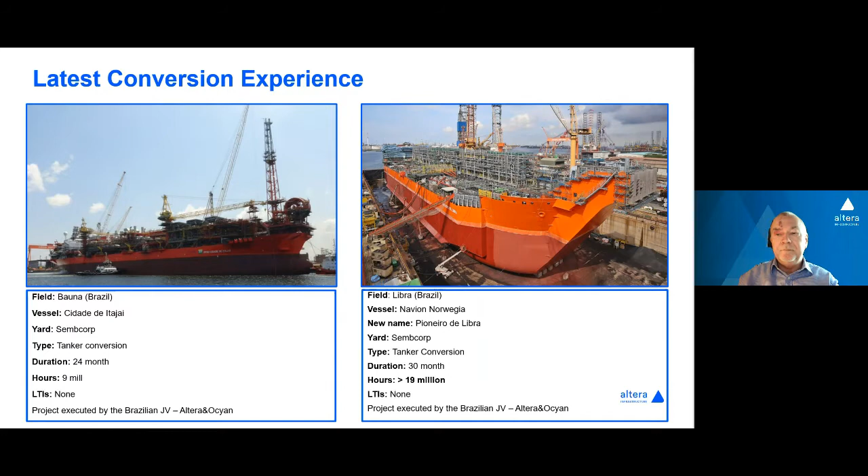What we see here is the project we did, Navion Norvegia to Pioneiro de Libra. As I said, a very successful project. Today, Libra is operating for Petrobras offshore Brazil. We have a long-term contract until 2029, and there are also opportunities for further extension on that project.

But it is interesting to see how it looked before it was converted and what a sophisticated vessel it is today. And when you look at it, you may say, oh, this is not really a big one. It's only 50,000 barrels per day. But what is special with the vessel is that it is done as an early production vessel, which actually can move from one place to another. And therefore, it actually has to be designed for different compositions. So we would say this is a very successful project. So let us go to the last slide in my part of the presentation.

And here we actually see the shuttle tankers we have available through the unit in Altera. In the beginning, I showed that they had 29 shuttle tankers, and you will see that I have only mentioned 13 shuttle tankers here, and that's because these are the ones we have seen as suitable for conversions. The other ones are newer.

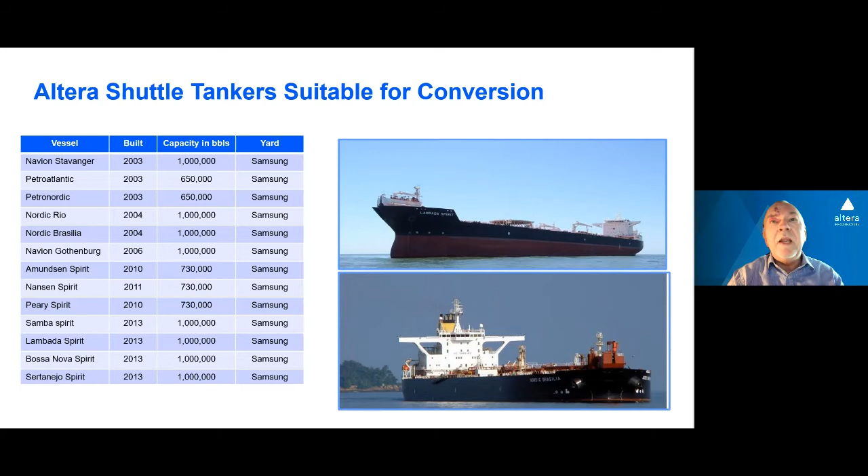So let me now hand over to Bernt.

Thank you, Stig. The focus in this presentation is around some key elements of converting a shuttle tanker into an FPSO. I will not go into all the details of the conversion projects, but the focus will be on the actual benefits that you as a field developer can gain if we are able to use a shuttle tanker where we are the owner of the vessel, and we can use that as the donor for the marine hull.

So what are actually the benefits of utilizing an existing shuttle tanker? Of course, you have the operational and commercial aspects. What that renders is that we actually know the operating history of the vessel. We also know to which level the vessel is maintained, and of course we have access to vessel inspections.

Utilizing an existing hull will also lower the greenhouse gas emissions, and is part of our sustainability objectives, and I'm sure that's the same goal with the clients. We also have the commercial access, so it takes out a party in those negotiations. How low cost you will get, that we'll have to discuss with Stig, but at least we have that commercial availability. But there is of course more.

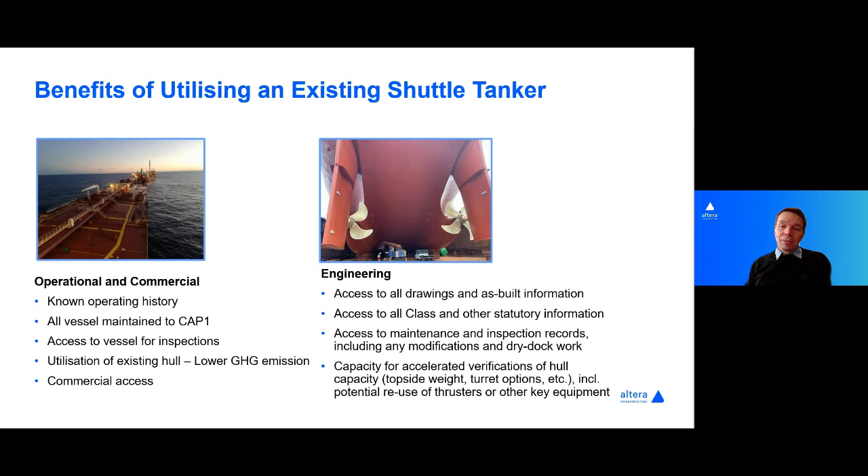We also have the engineering aspects. From that point of view, we have access to all drawings and as-built information. For example, we have performed projects utilizing third-party vessels, and we might in the early phases only have access to 70 documents. For an existing shuttle tanker where we have the ownership, we maybe have access to 700 documents, and we know they're up to date.

Knowing that, we also can look into all class and statutory information, not only recent but historic, which is also an advantage. And of course, we have access to all maintenance and inspection records, any modification, and the latest dry dock reports. All that gives us the capacity to quickly do verification if the nominated hull is suitable for a specific project.

Both with regards to turret, topside weight, where we can locate the turret if that is required, and potential reuse of some of the key critical equipment from a shuttle tanker, which normally has either thrusters and/or Becker rudders available, which could be an advantage for some of the projects.

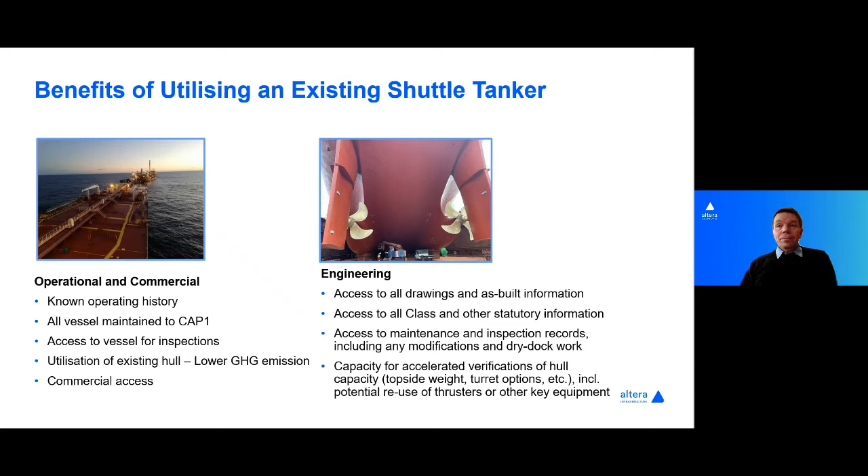So why is this important then? From this aspect, I have used information that was given to us from IPA, the Independent Project Analysis, a well-known industry company who review not only FPSO projects, but also large capital projects. In their database, they have over 120 global FPSO projects, where 75 are completed, including both new builds and conversions.

In this presentation, I will focus on the last part, which is related to our access to the shuttle tankers. So why is this important in real terms? Well, one thing is to look at it in percentage, but if you look at it in real terms, and I'm then talking dollars, you could get the feeling that engineering and project management were the most important aspects.

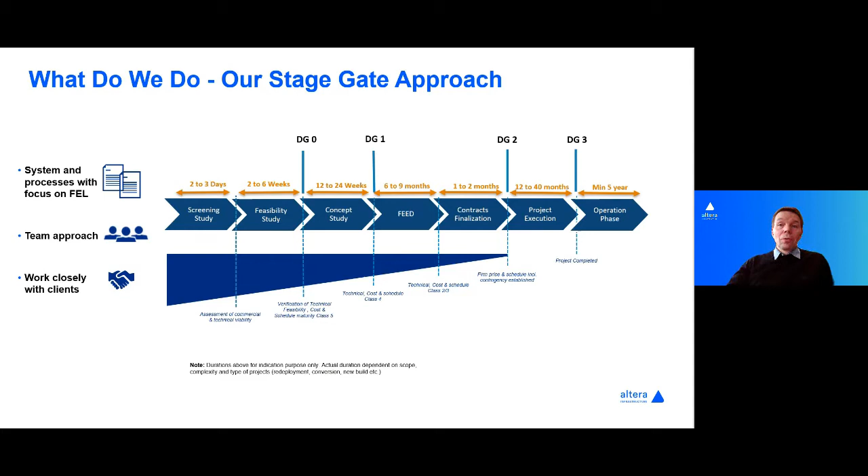So all our systems and processes are developed now with focusing on front-end loading. We look at team approach as key critical. Altera is not the largest FPSO operator out there, so we rely heavily on our partners to ensure that we have a good team approach, and that the team that works with the client can work closely and deeply engaged to deliver a solution.

So if you look at what we can do then if we own the vessel, I'm going to give you some examples. One aspect that is quite critical is to assess if we have the right vessel, the right size. So one example is, since we have all the information available, we have the GZ curve, the stability curve, the KG max curve, which is the center of gravity above keel. We can quickly do an estimation of not-to-exceed topside weight and the corresponding topside center of gravity. All this enables us to provide early guidance on restrictions for the topside design and if we have the right and suitable donor vessel for your opportunity.

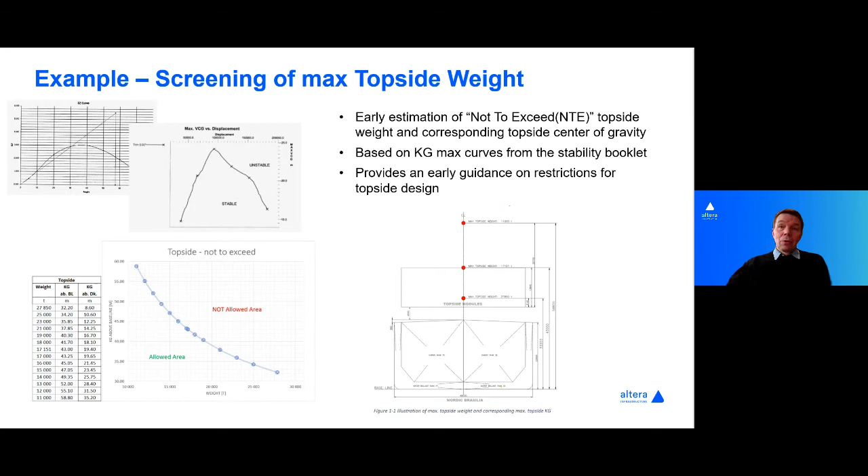But there's also more we can do. For some of the turret solutions, one of the key aspects is what is driving the project. Here, for a client, we did several assessments of what would be the benefit, pros and cons, with location of a turret. This was a submerged turret production system, and we looked at alternative 0 to 3, where alternative 0 is a more standard approach.

We looked at alternatives 1, 2, and 3, which moved the turret forward, all from moving it into the front of a cargo compartment, into the foreship, or even building a new bow section to include the submerged turret production system. All that was a good dialogue with the client to see both how we could maximize the storage volume, how we can ensure that we have enough square meters of topside and didn't take away too much of the space for the turret solution, and also to have a dialogue with the yard on the constructability and potential complexity of the solution.

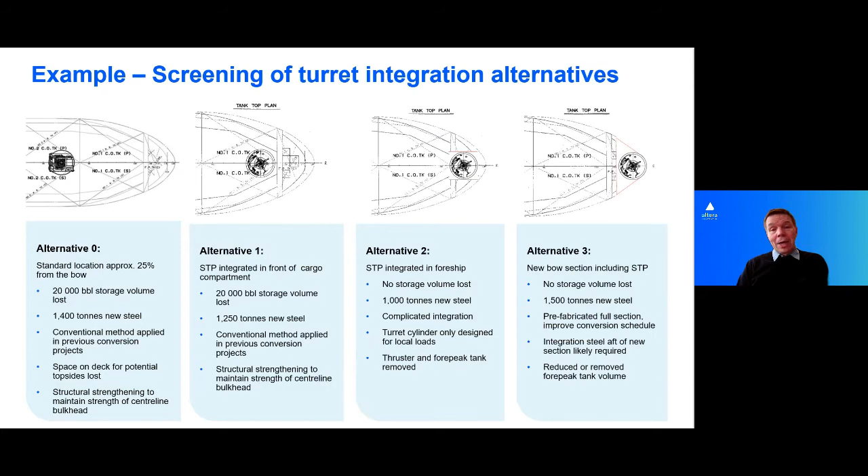Again, something that we can quickly do when we know the vessel and we have all the information available to us. But we have more examples that are maybe not technical, but just as critical.

Again, critical in the early phases to give confidence to the client, meaning yourself, that we actually can utilize the vessel as a marine platform.

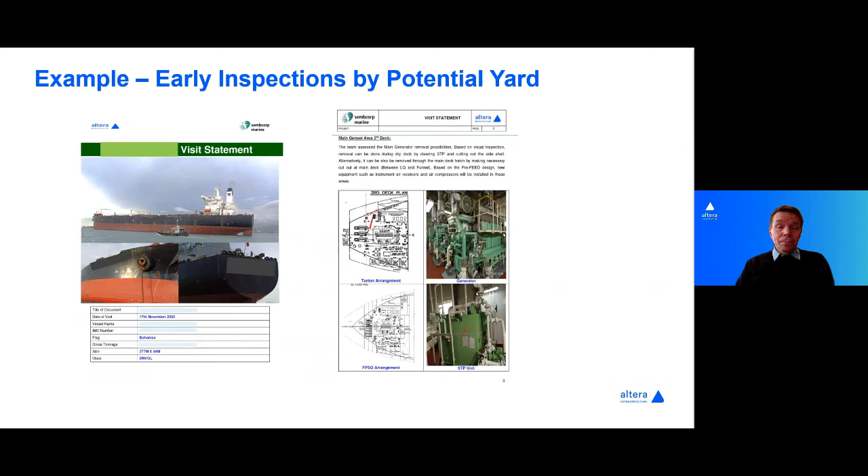Another example that goes beyond the inspection of the hull is that since we own the vessel, we of course also know the dry docking schedule. So in this case, we were also able, even in a COVID-19 situation, to enable an independent class society—the vessel was classed with DNV—to prepare further verification that the actual condition as reported by Altera and accepted by class was the correct one.

So again, this gave further confidence to the yard that we're on the right path, and hence when we talk with the client, we have a better and more secure position on the commercial and risk aspects in the negotiation, all to ensure that we can deliver on time and on cost.

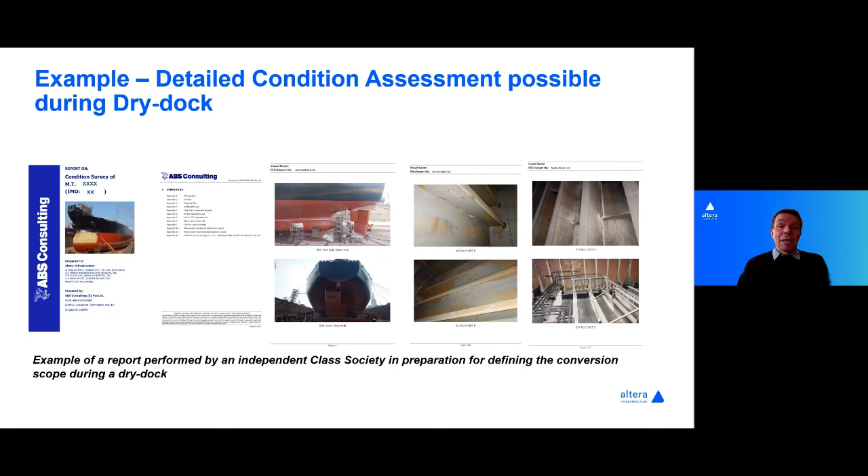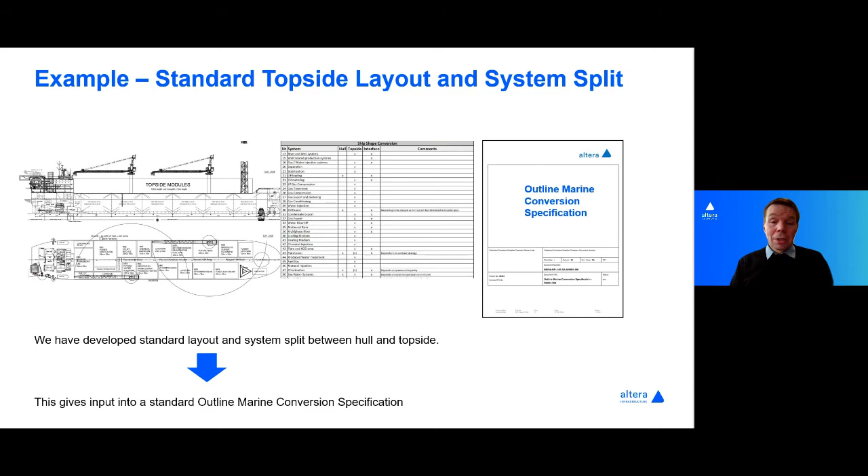All in all, I hope this showed some examples of what we can deliver, what we can do, what we are doing, and not least that we have this in our toolbox, and that the benefit of utilizing a vessel that we own is huge for the client in a field development with regards to reducing risk and ensuring that we deliver on time. So that was the key elements in my presentation, and I'll hand over to Stig for final comments.